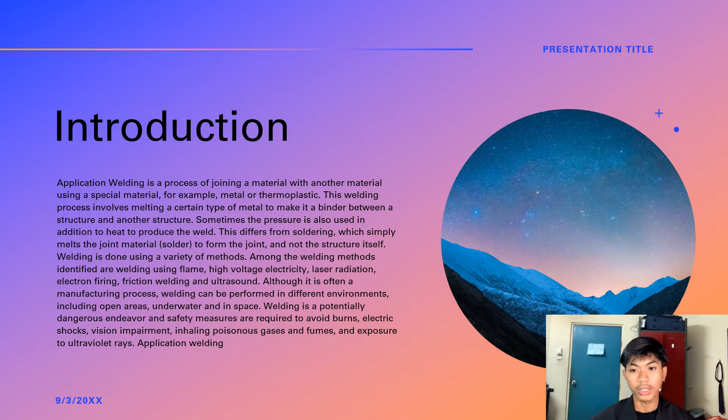This differs from soldering, which simply melts the joint material, solder, to form the joint and not the structure itself. Welding is done using a variety of methods. Among the welding methods identified are welding using flame, high voltage electricity, laser radiation, electron firing, friction welding, and ultrasound. Although it is often a manufacturing process, welding can be performed in different environments, including open areas, underwater, and in space.

Welding is a potentially dangerous endeavor, and safety measures are required to avoid burns, electric shocks, vision impairment, inhaling poisonous gases and fumes, and exposure to ultraviolet rays. Application welding.

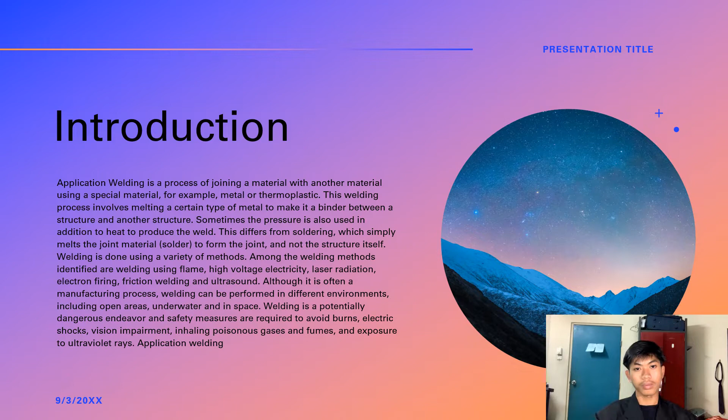Arc welding. The definition of arc welding is a welding process that is used for welding metals with the help of electricity to generate sufficient heat for softening the metal, and when the softened metal is cooled, the metals will be welded. This kind of welding uses a power supply to make an arc between a metal stick and the base material to soften the metals at the point of contact. Arc welding is used in the development and construction industry.

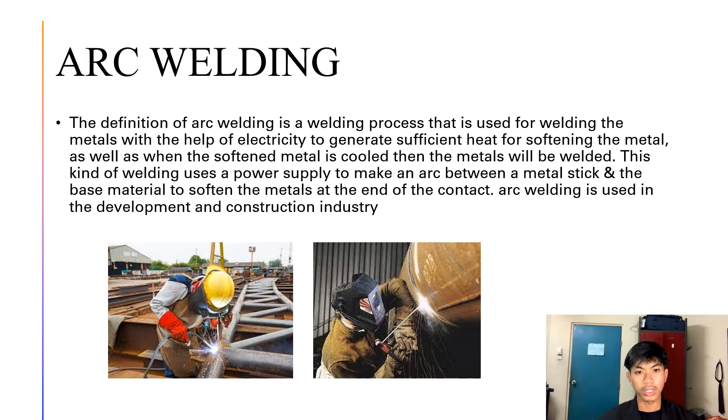Next, for the basic concept, shielded metal arc welding with the transformer welding machine depends upon this fundamental fact. When one side of the welding circuit is attached to a piece of steel, a welding electrode is connected to the other side and the two are brought into contact. An arc will be established. If the arc is properly controlled, the metal from the electrode will pass through the arc and be deposited on the steel. When the electrode is moved along the steel at the correct speed, the metal will deposit in a uniform layer called a bead.

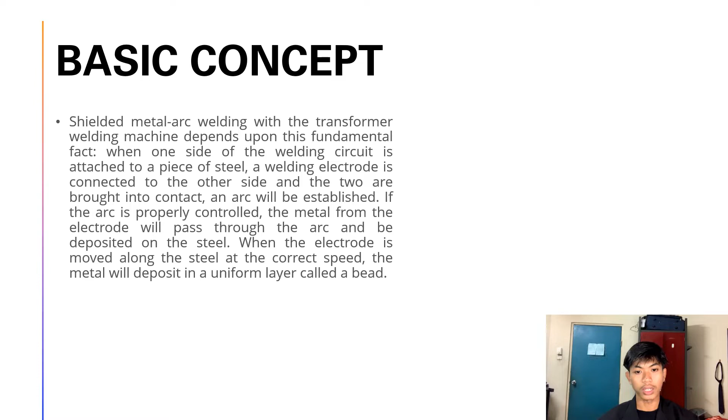Advantages or pros of arc welding. First, it is suitable for high-speed welds; second, it uses a simple welding apparatus; and it can work on AC or DC. It has superior temperature, with less smoke or spark involved. Number five, portability as a result of simple equipment. Number six, high weld speed. Number seven, it is a fast welding process when compared to others. It offers a strong joint.

It produces very little distortion, high corrosion resistance, and it has the ability to weld porous and dirty metal. The equipment is inexpensive, and its operation can be performed during rain, and where there is no electricity, the power supply can be generated. Smooth welding is achieved, and lastly, it has good impact strength. Arc welding beads can be used to create designs on fine metals. It can be carried out in any atmosphere.

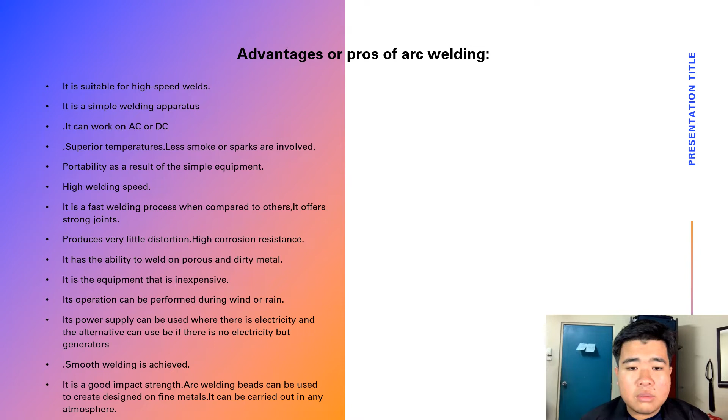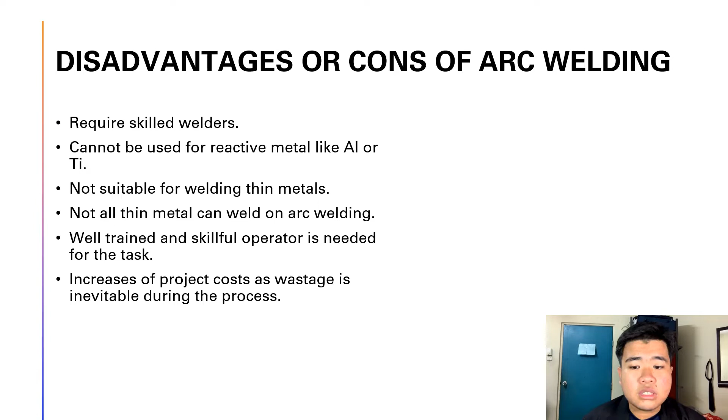Okay, next, disadvantages or cons of arc welding. First, it requires a skilled welder, and number two, it cannot be used for reactive metals like Al or Ti. Number three, not suitable for welding thin metals. Number four, not all thin metals can be welded by arc welding. Number five, a well-trained and skillful operator is needed for the task, and lastly, increased project cost, as wastage is inevitable during the process.

Okay, now the butt joint. A butt joint is a technique in which two pieces of material are joined by simply placing their ends together without any special shaping. The name butt joint comes from the way the material is joined. The butt joint is the simplest joint to make since it merely involves cutting the material to the appropriate length and butting them together. It is also the weakest because, unless some form of reinforcement is used, it relies upon glue or welding alone to hold it together.

Because the orientation of the material usually presents only one end to a long gluing or welding surface, the resulting joint is inherently weak. Nonetheless, it generally provides sufficient strength in most cases, particularly when fasteners are used. The butt joint is widely used in many applications due to its simplicity, notably in rough carpentry and construction.

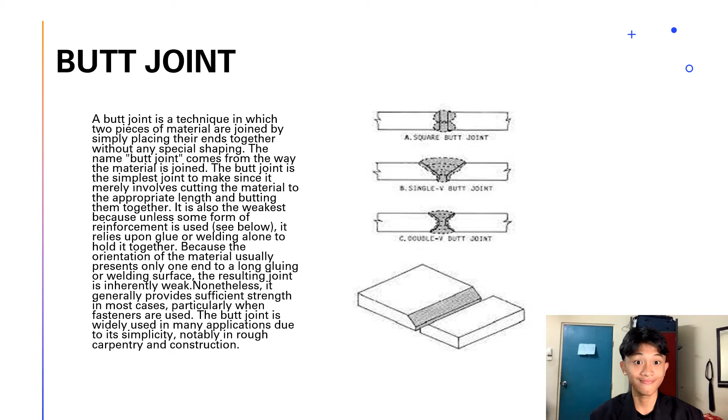Okay, now we are going to T-joints. The T-weld joint is formed when two bars or sheets are joined perpendicular to each other in the form of a T-shape. This weld is made from the resistance butt welding process. It can also be performed by extrusion welding; usually two flat pieces of poly are welded at 90 degrees to each other, and extrusion welded on both sides.

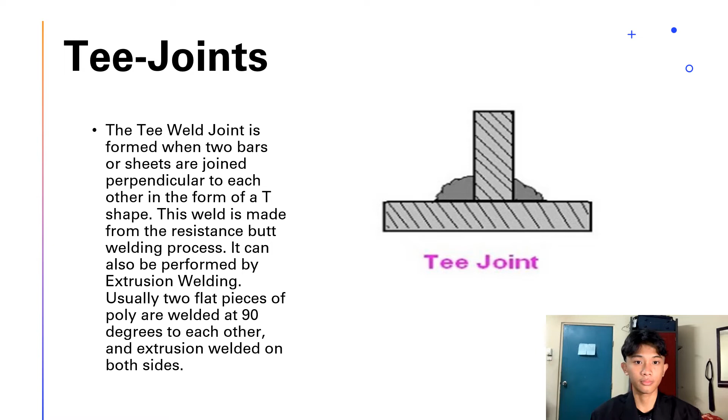I'm so sorry about that.

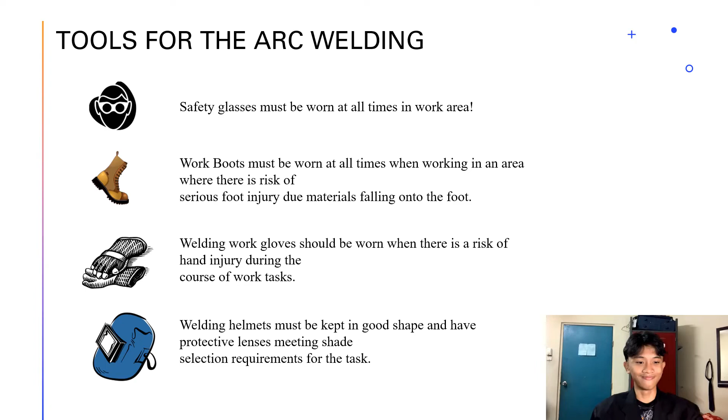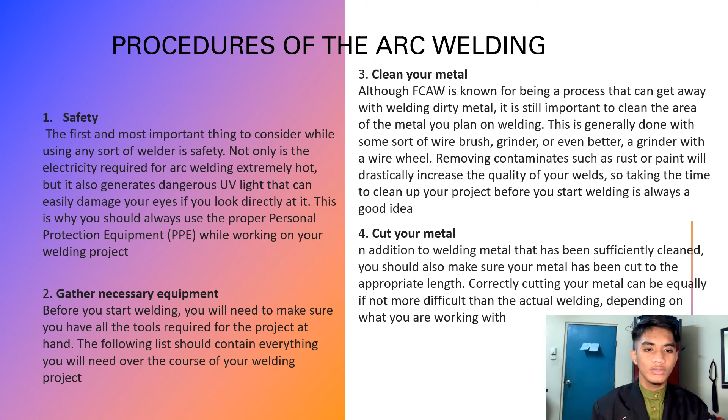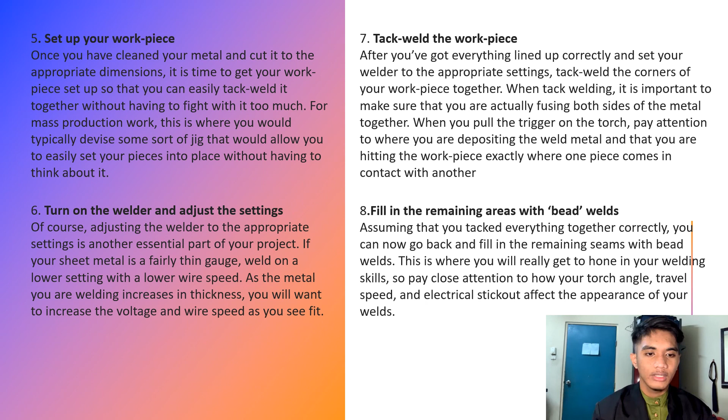Number 8, fill in the remaining area with bead welds. Assuming that you tacked everything together correctly, you can now go back and fill in the remaining seams with bead welds. This is where you will really get to hone your welding skills, so pay close attention to how your torch angle, travel speed, and electrical stick-out affect the appearance of your weld.